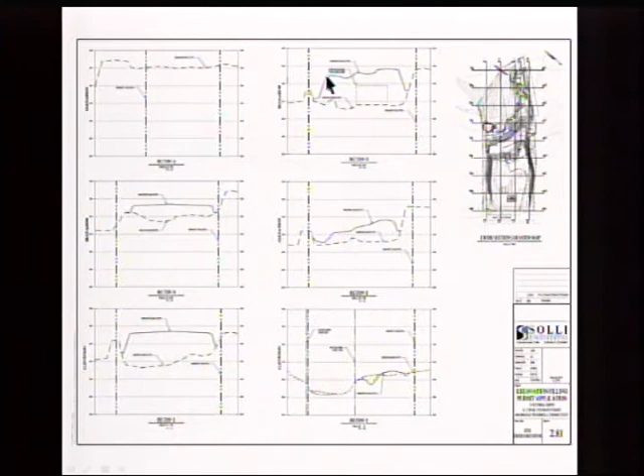In accordance with the fill permit requirements, we provided the requisite sections. This shows a good section, section D, which is approximately through the existing building. You can see the existing building elevation and what we're proposing from a grade standpoint, and the amount of fill material we're proposing to raise this, to really prepare this site for future development.

And again, here's another good example. This is section L, right through the center of the property. Through here you can see the existing topography as it comes down, the existing building, and where our proposed grading is to really raise the site, improve and prepare it for future development.

That's to accommodate a future development area, and we do have a potential development plan which we submitted. The concept is to provide a multi-story facility, potentially a mixed-use facility, which would include retail and restaurant uses on the ground floor coming in off of Route 25, potentially residential uses above that.

The site's actually been graded to capitalize on some of the existing grades, where towards the rear of the site this would serve as a ramp down, so you'd have a lower elevation which could be used for some potential office use, facing the rear of the property.

This utilizes the area to its best effect, taking advantage of the existing site constraints to maximize and establish some development opportunity for the property. So with me here, I'll ask him to come up and walk through his analysis from a wetland standpoint, talk about what he's observed in terms of functions and values and wetland quality. He was a big part of the preparation of the wetland remediation plan and the plant selections we proposed as part of the remediation area along the wetland fringe.

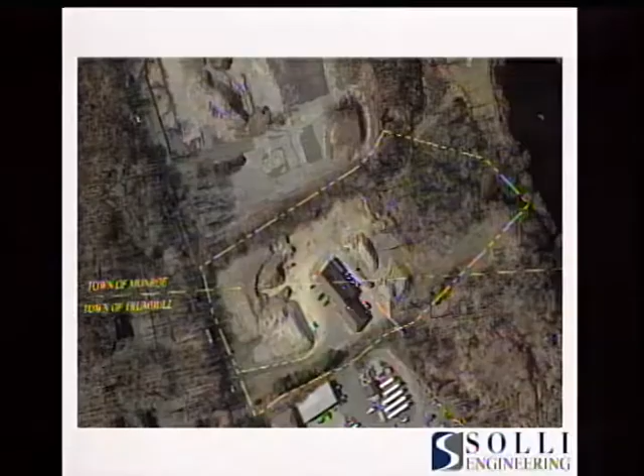Again, if you look at the photos—I know this is a little disjointed—there's another picture, 8, which is that isolated wetland. There's 7, showing what the C wetland looks like. What you're looking at in the back is the man-made pond and watercourse. Here's another picture of C. Photo 6 is a typical profile of the fill soils in and around the wetland being remediated. Photo 4 is the B series, a mixture of scrub, shallow marsh, and wooded swamp along the edges.

The picture above, number 3, is where they started to mitigate. It's hard to see, but right there is one of my new wetland flags, so I actually flagged this as a wetland now—the wetland boundary actually expanded from previously. But all this material will be removed, and this area will eventually be mitigated. Again, that's the C-series.

Let's look at the functionality. If you look at my page 5, I have a little table there. The isolated disturbed wetland has no principal functions, but it does have some functionality to it.

Groundwater recharge, it does trap sediment and toxins and nutrients. However, as you get away from that and into the interior of the site, which is where the main wetlands are, you can see the principal functions go way up. They're actually pretty nice wetlands.

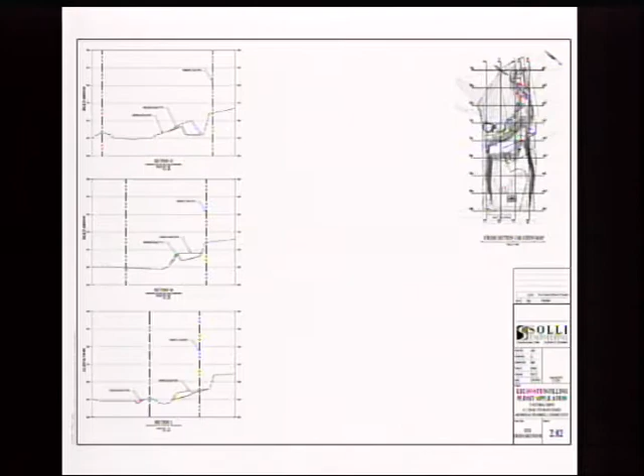Thanks, Jim. Just to talk about some quantities — as part of the previous wetland remediation application, which was approved and started but not finished, that work actually created an additional 1,848 square feet of wetlands observed on the property after completion. So we've already created and increased the wetlands by 1,848 square feet.

In addition, this plan includes an additional 7,810 square feet of new wetland creation as part of this application, to deal with the analysis of the previous impact to wetland restoration area E, and also to address the proposed direct wetland disturbance for this small, man-made irrigation pond in this location. This expands and incorporates this entire area into the water quality sediment basin and future water quality basin.

So with that, I'd be happy to take any questions from the commission. I think we've been working with staff, and we've had some back and forth with Denise. I think we've addressed the majority of her comments. There are still some comments we're working through with Scott, the town engineer, but we've addressed the majority of them.

He does have some minor comments relating to our drainage analysis, because this site has been designed so that this sedimentation basin can accommodate the 100-year storm event with additional freeboard. We are proposing to install the future outlet control structure for when this pond becomes a stormwater quality basin. However, this outlet control structure is essentially a catch basin with an inlet top, which once filled would overflow into that basin and then discharge towards the north.

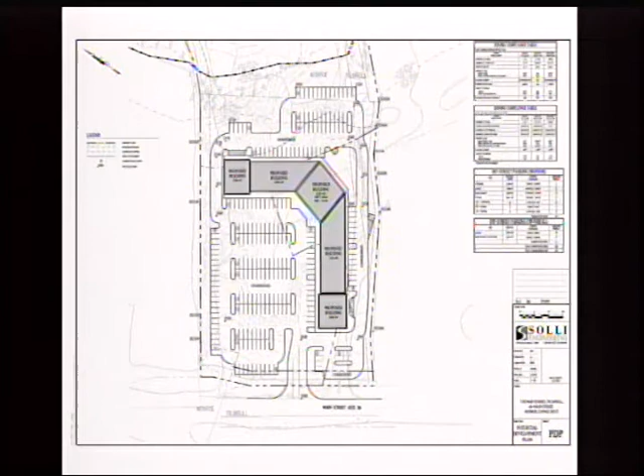But we also wanted to look at this from a practical standpoint — we have a property that is landlocked from its current owner, which creates no real value and has impacts that need to be remediated. We wanted to create a mechanism and a vehicle to ensure that remediation takes place. Well, pardon me if I don't consider a sedimentation basin remediation — remediation is a different definition altogether, and mitigation is slightly different than that. So, sedimentation basin, I would agree with you. But the long-term plan is to create a water quality basin, which is going to provide considerable improvement and additional habitat from what's out there today. If you were to visit the site today, that area has been disturbed, it was used for storage.

You can even see it on some of the older aerials how L&L Evergreen used it. There were trucks and vans back here, there was just plant materials they had brought in, like 3/8 stone, and kind of created all these pathways and things like that.

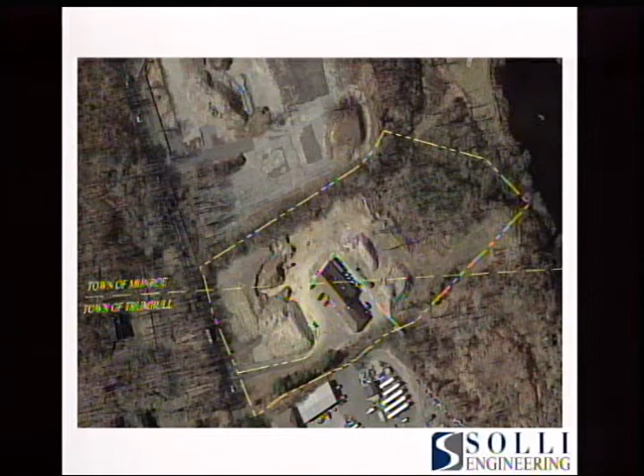So this needs to get remediated. Obviously the current owner, there's not much they can use it for. So this lot line revision and this conveyance of the land really creates the vehicle for this entire area to get improved from its current condition. So while yes, there is a potential, but we wanted to make sure that what happened here was robust and it was going to provide a considerable improvement than what's out there today. And this is kind of the vehicle to make that happen.

And again, this area, during the fill permit operation, would be used as a sediment basin. But as part of our future site plan application, this sediment would be removed, and then this basin itself would have some additional plantings proposed. And as I mentioned, if you were to go out there now, about 90% of that upland strip that we're going to dig down and build those basins is mugwort, which is a pretty aggressive invasive.

It's taken over. As long as you're at the microphone, Mr. McManus, let me ask you some questions. Sure.

What is the purpose, from a natural outlook, of an upland that surrounds a wetland? What is its function, what is its value in relation to the wetland? It's a good question, no one actually asked that before. It has a lot of functions. Uplands, 75% of Connecticut is considered upland on average, and 25% is wetlands. That's where we live, that's where a lot of plants live, that's where a lot of animals live. And I always call wetlands the liver and the kidneys of the earth. Everything that flows off of the uplands goes into the wetlands, theoretically cleans it, brings it back to background levels by the time it reaches our rivers, lakes, ponds, and eventually the ocean.

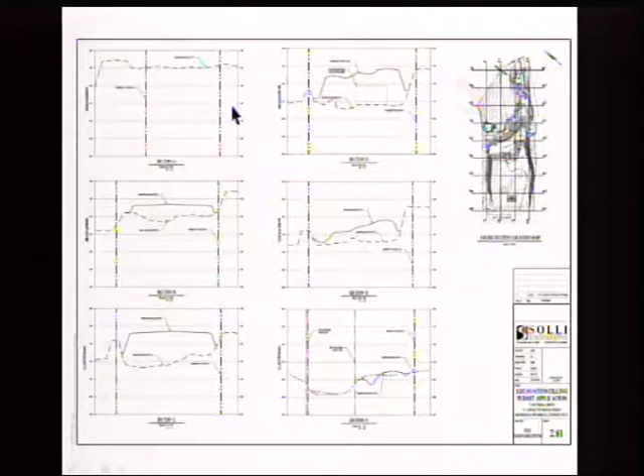How much of that upland review area is going to have fill in it? As slope? Again, we've only got about 86 cubic yards of fill within the regulated area, so very little.

Is all of that slope not in the regulated area? Well, a lot of this is actually cut. Part of what we're doing is, this is the limit of the 100-year floodplain. As part of that remediation, they expanded where this floodplain was. This was the line from the FEMA map, and this is the current line from contour data.

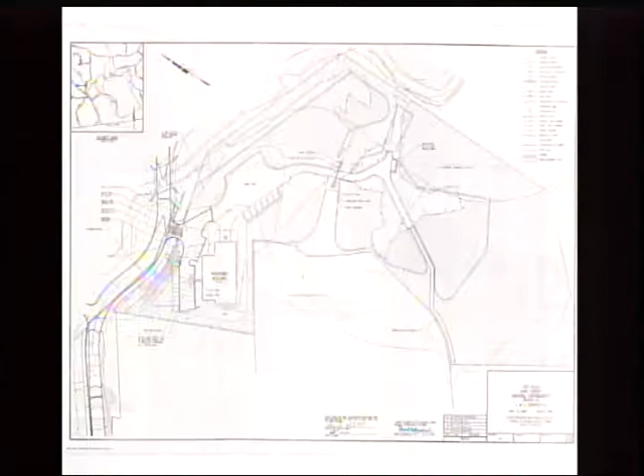Which FEMA map, what year? The most recent. How about if you went back to the original, that original pictorial you put up there? The very first one, like 150 years ago? Seems like it. Keep going, the one where... this one? Yes. Would the FEMA map be the same on that map as it is today?

There was a study done, I believe, where a FEMA map was established in 1984. There was a hydraulic analysis done for the town of Monroe in 1984 which established a FEMA line. That hydraulic analysis was updated in 1989. I don't know the difference between those lines from 84 to 89, but we've reviewed contour data from 1988, before the 89 update. Some of those contours don't seem consistent from a horizontal floodplain standpoint. Those contours showed elevations that varied by about 8 feet from what was in the FEMA study. It's hard to marry the 88 contour data, the FEMA line, and the 89 analysis together, which is why we wanted to make sure we don't put any fill in the floodplain. We don't want to have to rely on that analysis. We want this application to only increase the flood carrying capacity on the property.

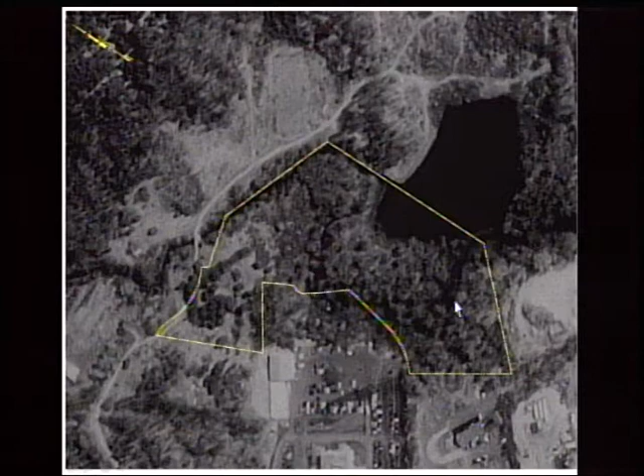In terms of the difference, this is a great picture to show the landfill. It was ongoing, and you can see, before any of the work with L&L Evergreen, there's a clear delineation through here versus where it was. That's generally consistent with where we are from a wetland line standpoint. That's why when we went back and did test holes, based on the soil profile we saw, we didn't see wetland soils, organic matter, or redoximorphic features. That's why we concluded this really was just an inclusion. Understanding where the floodplain was, we didn't want to go down the path of placing fill and providing compensatory storage. Knowing the history, we decided to only increase capacity at this point, making it easier to handle from a permitting standpoint.

Does any of the commissioners have any other questions? I just have one quick one. I just want to make sure that the applicant was aware that we have this presentation that was made at Town of Trumbull, this report.

Yes, so in here, just for the record, so we can discuss it later if we wish, there's a fairly good description of A1A, what you found in that particular zone. If you wanted to read it into the record, or if not, I'd just comment that it's quite descriptive. That same report was submitted to the town of Monroe.

Yes, I think it was Town of Trumbull actually, but that's fine. It was submitted to the town of Monroe as well. It was an appendix of our overall engineering report. The reason I bring it up is he said he may not have covered that in the detail he felt, but it's very descriptive. He did a good job. I'm hoping everybody has my report, because each town got exactly the same report.

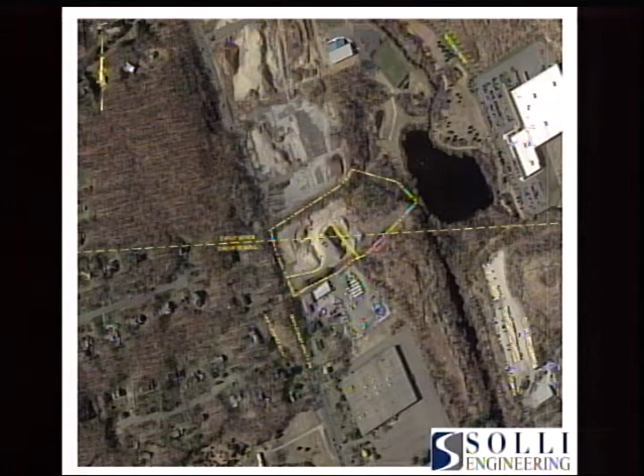Let's see, this is... we talked about the pending, so that's kind of been answered now. When you talked about the remediation of the accessway, I think you touched on it tonight. On the plan it just said to be remediated, but in the presentation you did say that the fill material for that accessway, that piece going towards 5 Victoria, was going to be removed as well. Yes, so that would actually be excavated down to the natural elevation of the wetlands on either side of that road, and we are proposing some plantings through there, based on our coordination with Jim.

The note had just said it would be remediated. I saw the plantings, but it didn't say the fill was going to be removed, that's why I was questioning. Yes, we would be removing that material all the way down to the natural grades on either side of that road. Just so you know, I was at 5 Victoria recently for a monitoring report they owed us, and I was walking from the opposite side, so that's why I knew there was fill there. Yeah, and we did, I think we submitted that report recently, and it does look great, it's an improvement. There are some things we still have to take care of.

Further on, you talk about the remediation being done. The original remediation, it was before you, remediation was being done, it wasn't completed. Now, sometimes I hear it said that it has been done, but it hasn't been done. So, the details as outlined on the plan approved by this commission, the excavation took place and the plantings further, but the full establishment of those as wetland areas was not completed. And basically when we were involved, we said, well, I don't want you to go plant plants in that area because we need to look at this whole area as a whole.

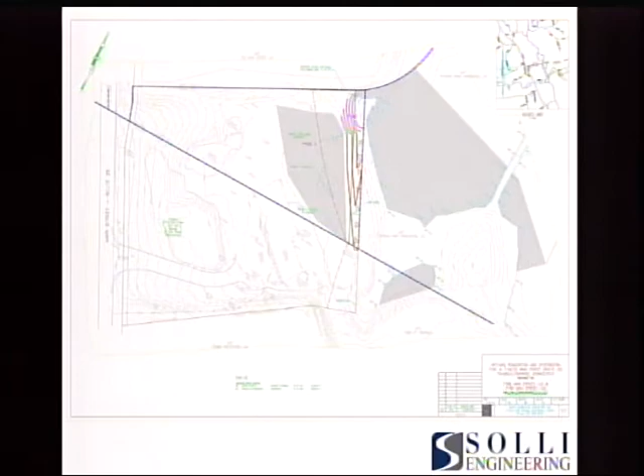You can kind of see that from some of Jim's pictures. I have some photos too, though I don't know the time frame between when I went. I could see Jim's stakes, the property line stakes, down at the hole with the water. Well, they dug enough out that now it's a wetland. Well, they're to the wetland soils, that's the thing.

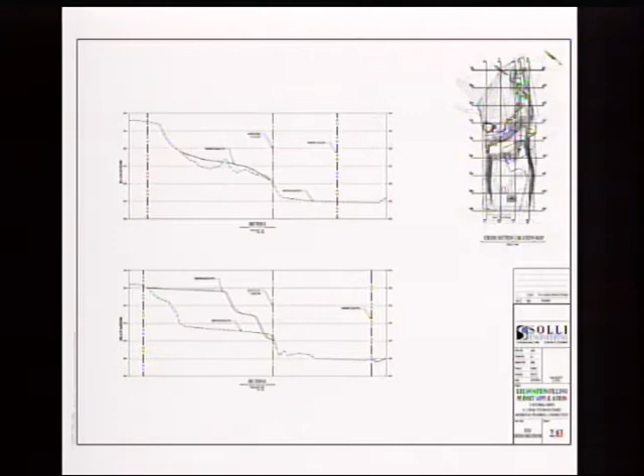So by Connecticut definition, it's now a wetland. It was a wetland, it was filled, now it's non-filled, so it's a wetland again. We just haven't finished the job. That's part of what we've outlined in our remediation plan, in terms of where that wetland edge is going to be and what we're planting. Sometimes it's semantics, because it wasn't done, now it's done. I'm just trying to get that clarified a little bit.

In picture 3, I'd call that a rough grade right now, and that needs to be, the rest of the fill taken out, established, planted, completed. So what activity is going on now that I see the trucks and the backhoe and all that stuff going on? Is that the excavation that he's not supposed to be doing?

Well, first of all, a lot of that activity stopped. There was activity ongoing throughout the summer, and about a week ago, one of the things found is they started to do this work, started to expose this, and found all kinds of stuff going much further back than they anticipated. That's why the area of excavation grew, because they found all kinds of stuff that wasn't supposed to be there, working way behind the building towards the dump. So there's material that's been stockpiled there, and part of this application is to address the fact that there was activity, but we need to get all that cleaned up so they can move forward under valid permits to do this work, to remove some of those stockpiles.

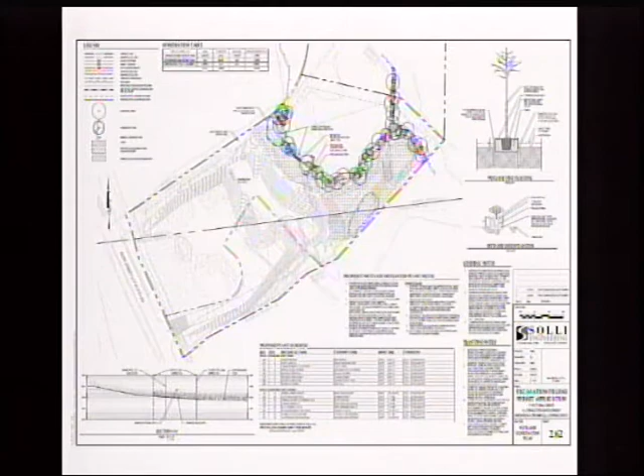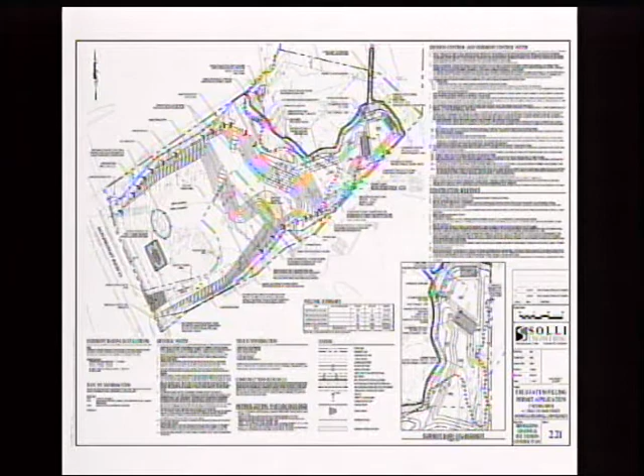When they started getting in here, it's amazing what L&L Evergreen did. They essentially found like a house back here, and a lot of debris and tires and things like that. A lot of that stuff has actually come out, which, when they started to do the remediation, all of a sudden they realized they had a lot more to chase. But I saw a lot of the activity more behind the building.

So they were way back there, and there was a lot of truck activity, a lot of backhoes moving material. I saw this when I was at 5 Victoria, so I don't know, was this very recent? I'm not totally aware of what exactly was going on, but I'm wondering, I mean, shouldn't they really be addressing it, because they shouldn't be doing any work out there. Yeah, and there was a lot going on.

What is your timeline for your remediation? So our first step is this approval. We got approval from Wetlands, and we're in the process of going through these applications with Planning and Zoning. We think we're next on the agenda for next Thursday, or it may actually be the first meeting of January because of the timing, but they want to start doing this work. A lot of the excavation across the street is going to happen over the winter, but they want to start this work immediately once the weather breaks.

These are two separate issues. The filling is one thing, the remediation is quite another. You're absolutely right. So with any of these applications, from a statute standpoint, the timing is one thing. But is the applicant's intent to get this approval, and then as soon as the weather allows, start this work in the spring?

Okay, how about completion date? We don't have one. We could certainly talk through one if the commission would like to establish one. I think we would. I don't know what the commission feels.

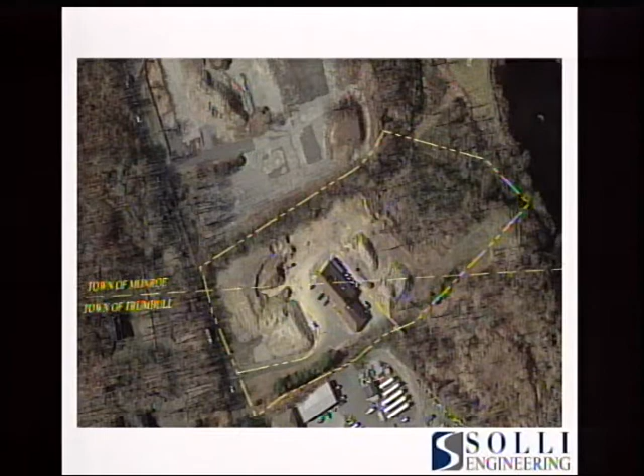Okay, I'm going to open this to the public. Do I have any members present that would like to speak in favor of this application? Seeing none, do I have any that are opposed to this application? Seeing none, have I any comments of general nature or questions? Seeing none. If there's any more commission questions?

Okay, applicant, final statement? I think we have an opportunity here to address an area that really needs to be remediated. We wanted to take this approach, knowing the other issue with the other property, we thought this was a great opportunity to address this from an overall standpoint, really create a mechanism and a vehicle to improve an area that needs remediation, and bring it to the forefront sooner rather than later. So I think what we've done is in accordance with the wetland regulations, the planning and zoning regulations, and we respectfully request approval.

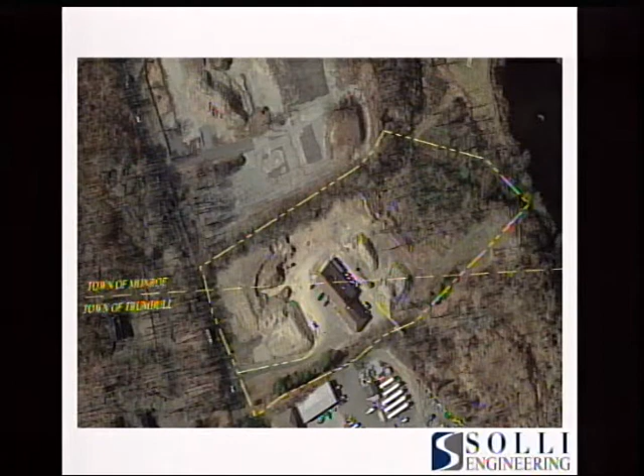Okay. Do you want a motion to close the hearing? I move that we close the public hearing and schedule for deliberation at a time to be determined by the chair. Second. Okay, do I hear a second? Thank you. All in favor? Aye. All opposed? Abstained? So moved.

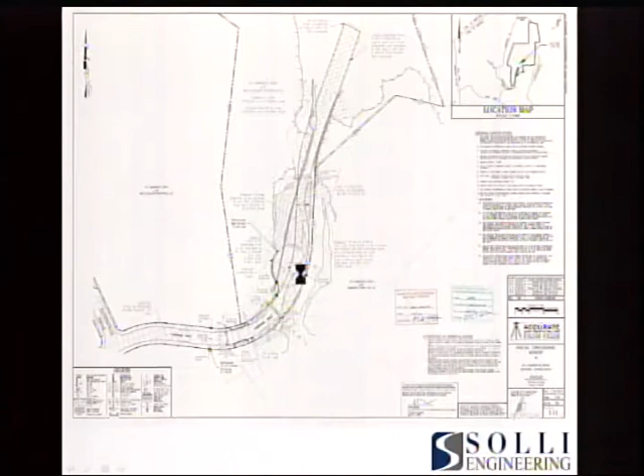And does it affect any existing wetlands? So any of the work that's being completed - there's a wetland corridor to the east of the site, and there's a wetland corridor to the west of the site. All the operation is really happening within the interior of the site. And again, from our observations, we haven't seen any direct wetland impact in some of these areas.

And again, as part of that Section 4 re-subdivision and that response and analysis that was done in 2014, we identified and recognized some areas to focus on from an improvement standpoint. So the work that you're doing now - can you say it doesn't affect anything that this commission would necessarily deal with?

Well, I think there's certainly been, subsequent to the 2014 assessment, activity prior to current ownership that expanded beyond the bounds of what was likely approved previously. That was done by someone else, and the current property owner needs to understand where those limits are and how we can address it moving forward. But the activities going on right now are not further exacerbating any of those things that happened or took place previously - it's really trying to assess how they can get this property productive again.

So I just want to understand where you're going with this. Are you asking the commission for time to come up with a program that addresses all the concerns, where what you're doing now doesn't necessarily affect what our concerns would be?

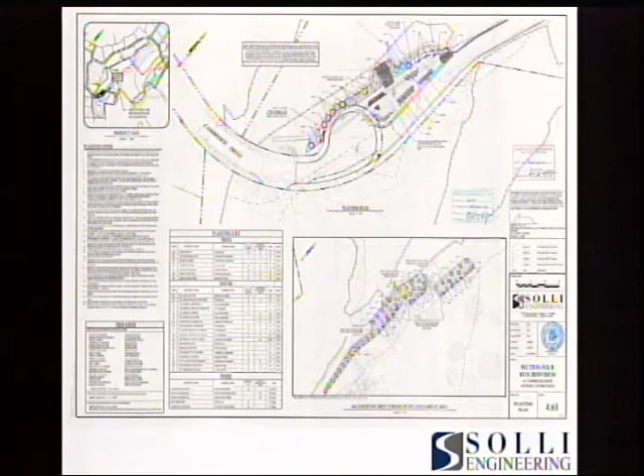The other thing I want to clarify is one of the things I do remember: in the second application for the Timothy Hill subdivision, we had Mr. McManus as the soil scientist and wetlands expert. He did state that I think it was vernal pool number 1 had gone from a tier 1 down to almost nothing.

And he found no life in it. He found, I think it was dewatered also. And his assumption was that it was due to activity off-site. Just wanted to put that on the record that there was some professional testimony to that.

I'd like to provide one clarification. In 2014 or 15, there was a vernal pool assessment done by Environmental Planning Services, which was James Cowan, Michael Klein, and Eric Davison, that group. In 2017, as part of the 36 Timothy Hill subdivision, we switched - it was actually Bill Kenny.

It was Bill Kenny who provided an analysis, and at that point, the approval for Section 6, for the continuation of Independence Drive to Timothy Hill Road, had the road in one location. The modification proposed to move that road slightly south, a little bit closer to one of those vernal pools. In both assessments, the only vernal pool obligate species in that vernal pool, the one that was inching closer, was fairy shrimp.

I'm not a soil scientist, but my understanding is you only have to have those conditions once every 7 years to be considered a vernal pool.

Part of this whole thing was, part of the approval was considerably taking out a large mountain, so that the crest of that hill was through here. So by lowering the site, that maybe did potentially alter the watershed contributing to that wetland. Part of our analysis is how do we bring these grades up and restore some of that hydrology? That's part of what we need to look at, because in order to really make sure we're addressing it, that's what we want to do.

That's my only question. Commissioners, am I right? So no pumping of water, no fill's gonna be brought in for the time being? So there is a desire to get out as quick as possible.

Any material that would be filled within that lower area would be clean, native material, and has existed on the site prior to current ownership. So there may be some dewatering as part of that, but any dewatering has to be done in accordance with DEP requirements, the town of Monroe requirements, and there's adequate protection measures in place to not create any sediment deposition into the natural resources.

So there is oversight. Yes, we're actively doing SEC inspections in accordance with DEP requirements, so that's minimum weekly, and after every rainfall event over a 1/10 of an inch of rain.

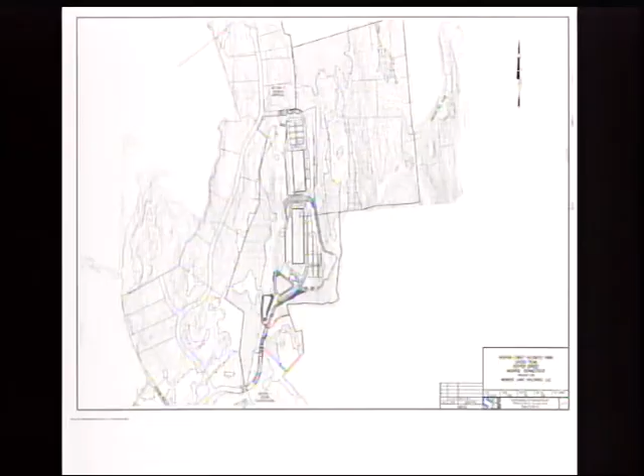IWV-2019-03, 48 Cold Spring Road, unpermitted structure and debris in a regulated area. And this has been postponed. Yes, we had a letter of postponement to the next meeting. So that'll be postponed to the next meeting.

Moving on to IWV-2019-05, 244 Webb Circle, construction of a stone fence to mark the conservation area. That one, if you want me to bring up, was the one where the house was built in the wrong place. So the property owner's not here. I'm asking the commission if that could be a staff review. So you did get the submission to review already, right.